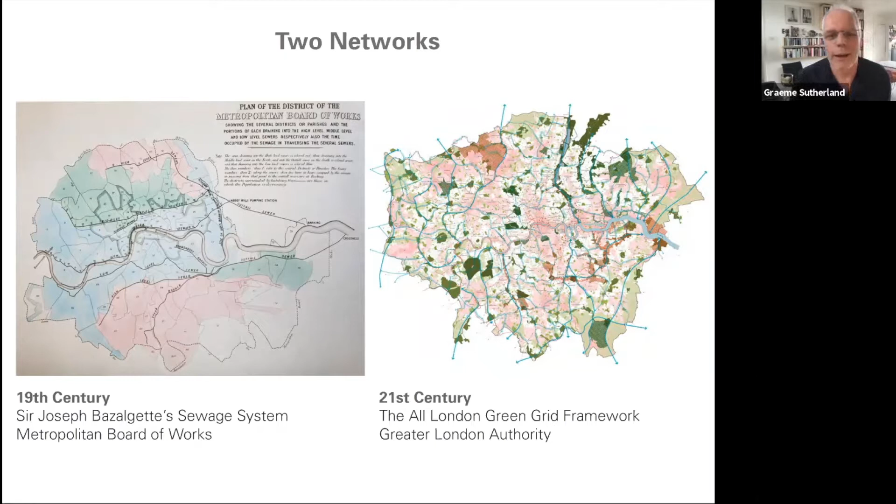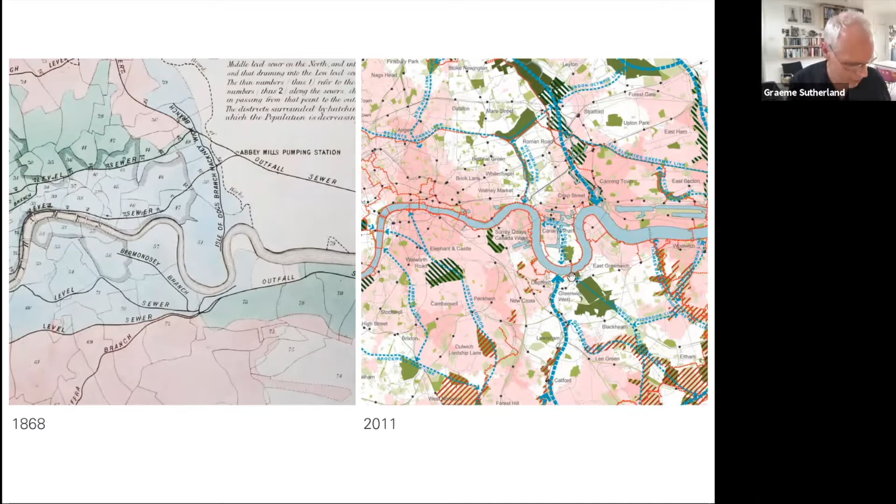I think that's useful. Neither of them are abstract systems. They're not abstract grids. They're sensitive, grounded in circumstance, and all about the particular, which I think is also really important and interesting. Zooming in, I'm also going to talk about how we have encountered both systems, working in the Greenway in East London, and how we've overlain essentially a bit of the green grid onto what you can see of a sewage system. And this is now history. This is not current work. 150 years ago, Bazalgette. 10 years ago, what we did, what the green grid was. What's happened since? I think it's interesting to think about things with a bit of distance and perhaps to reflect on what things have become and what they meant at the time.

But the beginning really of all of this, the beginning of London, is the river. And it's not just one river, it's lots of rivers. The dark blue are the hidden, the secret, the underground rivers. They've been bricked over time as the city's extended, but they're still there. And we're in an alluvial valley. There's a lot of rivers meeting the River Thames. And historically, rivers are a source of drinking water. And then almost at the same time, there's sewer. And gradually that doesn't begin to work. London became a pretty smelly and unsanitary place to live for many centuries. But the tipping point really happened in the 1840s and 1850s. The rapid urbanization of the centre, little attention paid to how waste was sorted, and the arrival of cholera and cholera epidemics, a topical theme thinking about epidemics today.

And so in the 1840s and 1850s, there were a series of cholera epidemics when thousands of people died in the city. And you could say the city was at significant threat. And it came to a head in 1858 when the Great Stink arrived, and the Thames was particularly noxious. And as is the way with these things, the change came because it impacted on Westminster. Houses of Parliament had to be closed, MPs had to be shipped out, and they were most upset. And so actually action began to be taken.

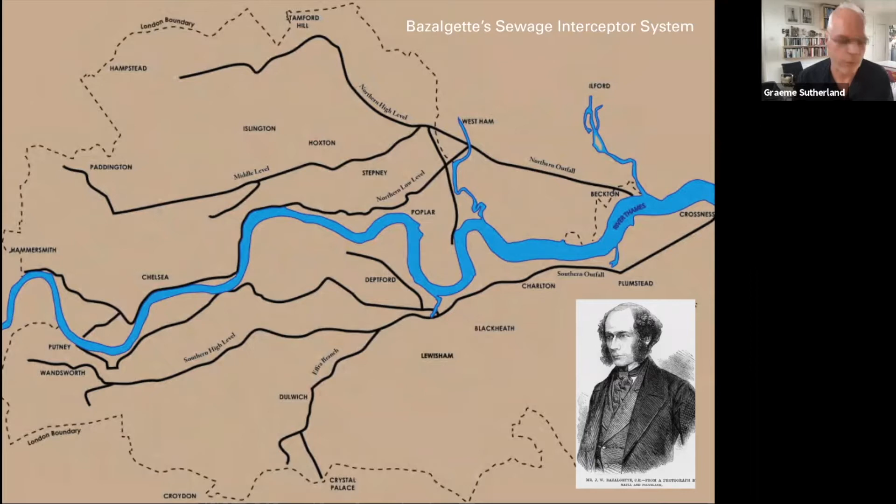What is interesting about all things is what happens as a side effect. What's the added value or the hidden extra? And here, the obvious one in central London is the Embankment. The Embankment is a super sewer. It's also everything else. It reframes London's riverside. It humanizes the north side of the river. It gives it that connection, notwithstanding the current traffic issues, that London's never had with the river. It sped the river flow up, so the river became healthier and cleaner, and it was built as part of the sewage system.

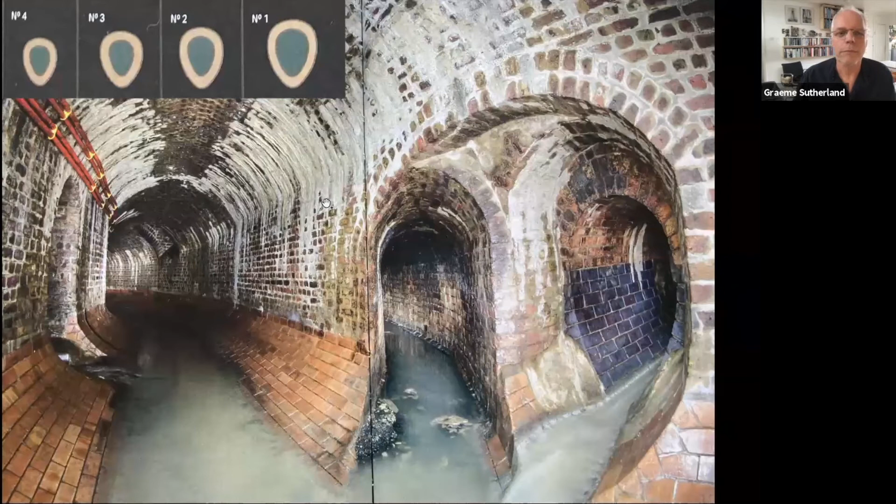Down in the depths, as I said, it's a very complex and atmospheric network, which I've not seen, but I've read about in some detail. There were a number of sections. One of the things about Bazalgette was he was fastidious about detail, and there are stories of him visiting site, a very senior bureaucrat being on site, ensuring the quality of what was delivered.

And you can see here glazed bricks in the lower part of the sewer and unglazed bricks higher up, the glazed bricks describing where the moisture usually is, and particularly hard wearing, and the kind of complex geometries of things coming together. So the shapes of the sewers vary a lot, but the smaller bores are all variations on the pear or the teardrop that you can see in the top left.

And the thinking behind that, which is really lovely, is you make it narrow at the bottom, which speeds up the flow, which hastens the movement of the contents of a sewer out of that area and on, rather than collecting it for a longer period of time. So when there's not a lot, it moves out fast, and when there's more, it also ships out at the same rate. So there's something very beautiful about that as a detail that perhaps describes a wider intention.

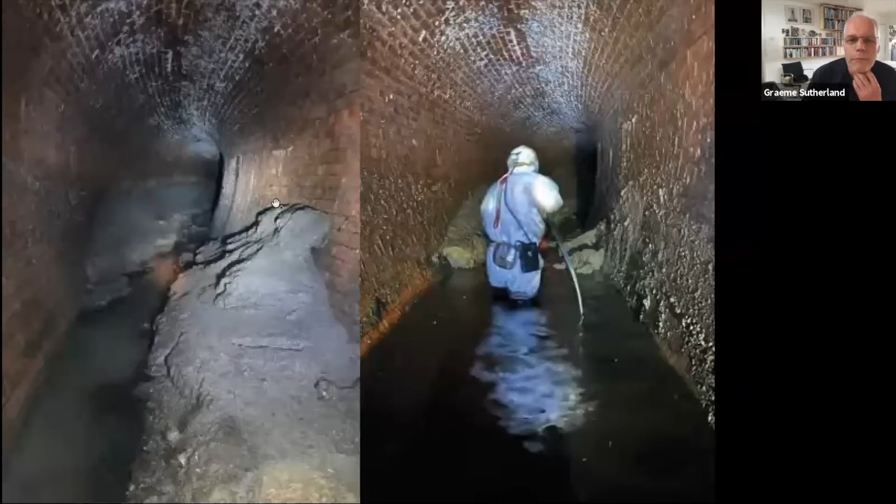That was 150 years ago. It's still here, and it's the reason that we are the city we are. It's the reason that London is a world city and has been so successful. You cannot underestimate how fantastic this bit of work was.

But it has been added to. There was major adding in the 20s and 30s. There's been tweaks and cranks. And then there are dealing with problems. Most people will know fatbergs, which are accumulations of fat in particularly narrower sewers, which is to do with what we chuck in the sewer these days. And a poor character spending his life unpicking it. But that's one example of what's going on.

But the longevity, I think, is really powerful, as is the reinvention. And I think that's something that's characteristic of really good infrastructural networks and frameworks, whatever their content or their nature. So it's the capacity to absorb what's gone before, and then the capacity to reinvent themselves and to evolve and to retain their usefulness.

And this is the London Tideway Tunnel, and this is an enormous bit of infrastructure. It's £4.5 billion worth of infrastructure. And what this does is complete that diagram that I showed earlier of Bazalgette's sewers. Because what I didn't say was that the sewers are combined, which meant surface water and effluent and sewage go in together. So when it rains, they get quite busy. And when it rains very hard, they overflow.

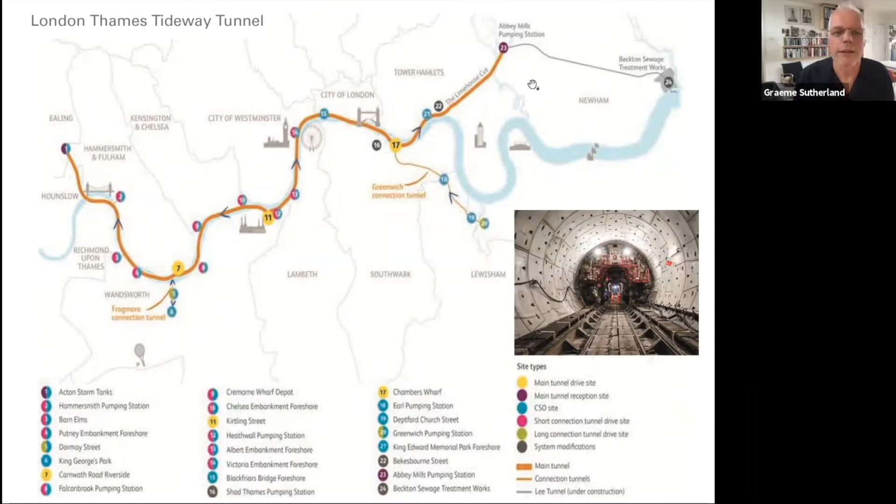And it continues to the east. It joins Abbey Mills pumping station, more of which later, a very important moment in the network. And then a new tunnel is bored under the Greenway heading to the Beckton sewage treatment works. So it parallels what's going on, at a deeper level. You can just about make out the orange high vis of the workers in the photograph. It's a huge tunnel, which describes its capacity and its need. And that's, I think, really exciting. And it's testament to the system that we have, that it can take that addition and that amendment.

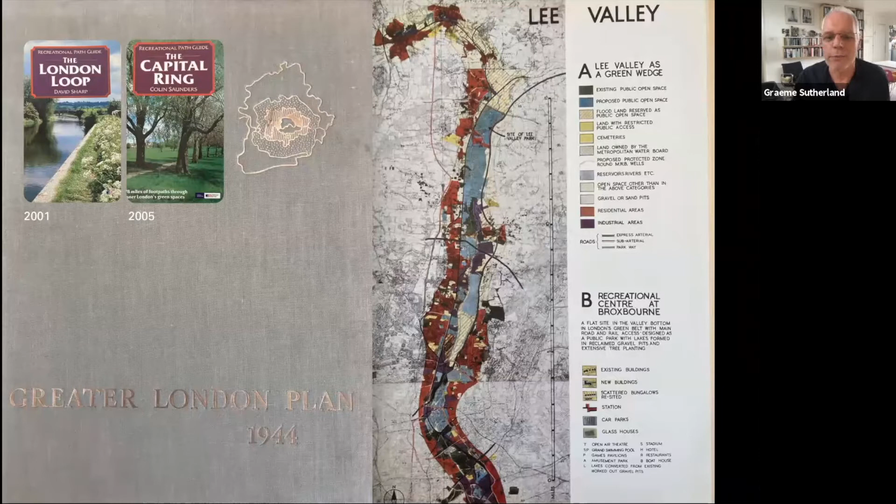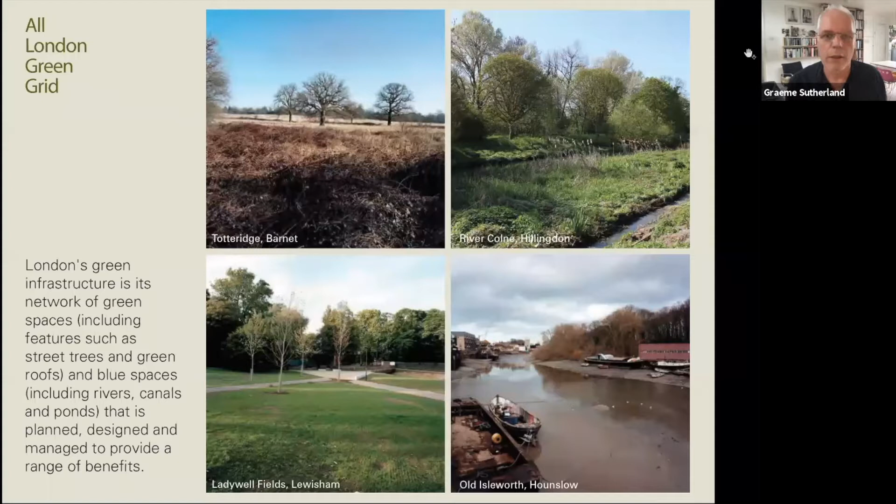And the Green Grid, really, the idea behind it was about connecting, making connections, and describing the layers of benefits you can get from that, and making that very clear. And thinking about multi-use again, right at the beginning. So it's a place of amenity, it's a place for healthy living, it cools the urban environment, it promotes sustainable food, it enhances biodiversity, and introduces resilience.

It's got many aspects to it, and that multi-headedness is really important and very strong. And then lurking in there is reducing flooding, and that's very topical, particularly in our times of climate change and the climate emergency, that's very important. But reducing flooding before it gets into the sewer network is actually helping Bazalgette. And so relieving pressure on the sewage network is one of the jobs of the Green Grid. There's a nice bit of synergy there, and that's good.

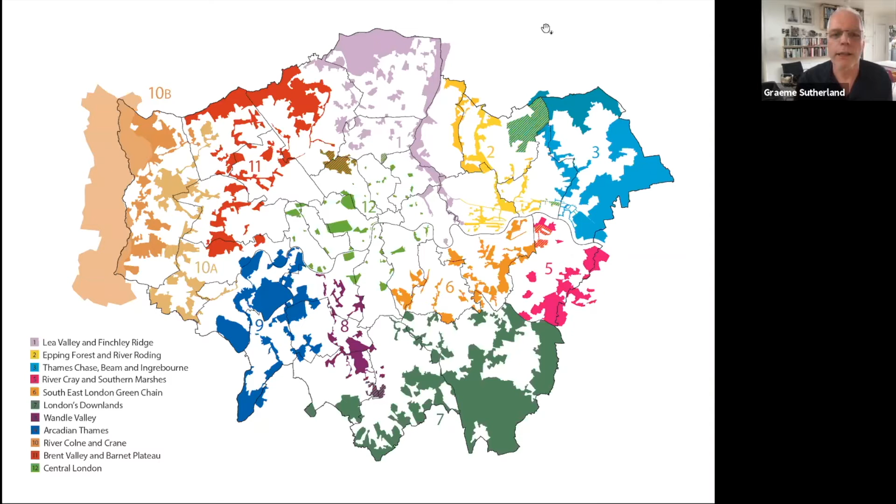So when it came to thinking about making the grid, and the Green Grid is really just a set of books with a set of drawings and a set of join-the-dots projects. How do you make things connect up? How do you make this network really work for animals and for people, for water? And where can you unlock those connections so that it's possible to have parallel networks of ways of inhabiting and using the city?

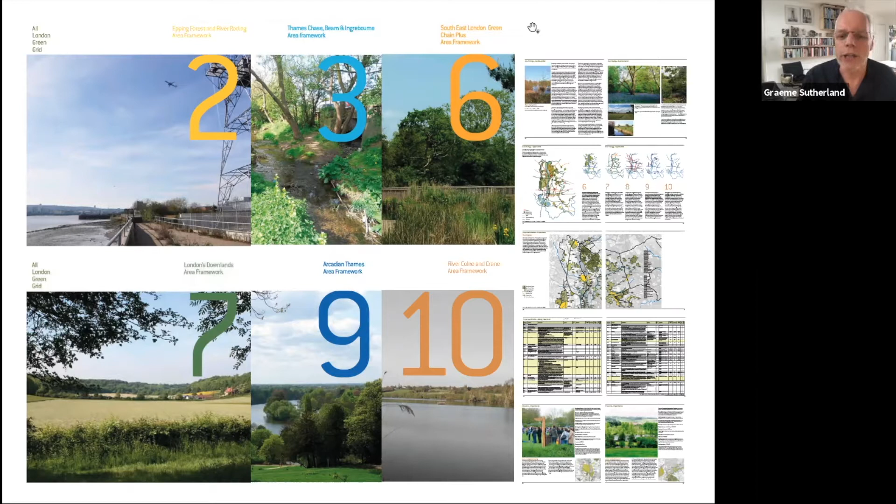And so each of the frameworks has got its own characteristic, its own description of its place, and slightly different priorities. So some of the outer boroughs began to look at how the green belt is used, the value of those spaces in between green belt and city edge, the rise of city farming at the edge, where people are still farming and encouraged to grow things coming back into the city. Water courses, and crossings, woods, and the rest. And the projects, a wide range, physical or to do with activity, but really about supporting that.

So that was 10 years ago. And policies have a shelf life. Politics moves on. The Green Grid still exists. It's less referred to, but it's there. It was taken up by boroughs. It's referred to as an idea, and the database is used.

And the byline for the national park city is greener, healthier, and wilder. So you can't argue with that. It's good. And it has a different emphasis. So it's not policy driven. It's not top down. It's not a kind of network to be distributed. It's not just strategic vision other than the idea, which is a shift in values.

It recruits people, and it invests small organizations with value and makes connections, and celebrates how you personally might influence or impact your local nature reserve, the connection to your local park, the users group that you're connected with, the waterway that's near you, or how local gardens in a street might change their nature. So it could be a very small project or a very large project. It provides an umbrella. So in that sense, it's very good.

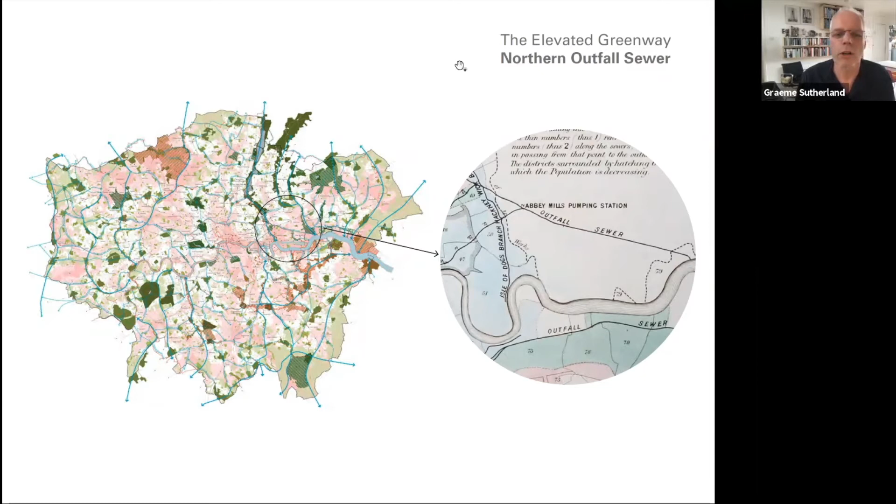Our involvement in sort of overlaying one with the other happened in the Lea Valley. It happened initially across the Lea Valley where the Olympic Park was, and then extended to the length of the Greenway. So really to talk a little bit about what we did, and some of the tactics we used to look at the connections between those two ideas. I'm not sure we thought the Greenway we were doing was part of the Green Grid particularly at the time, but it certainly was. And we were very alert to Bazalgette's work and the importance of that.

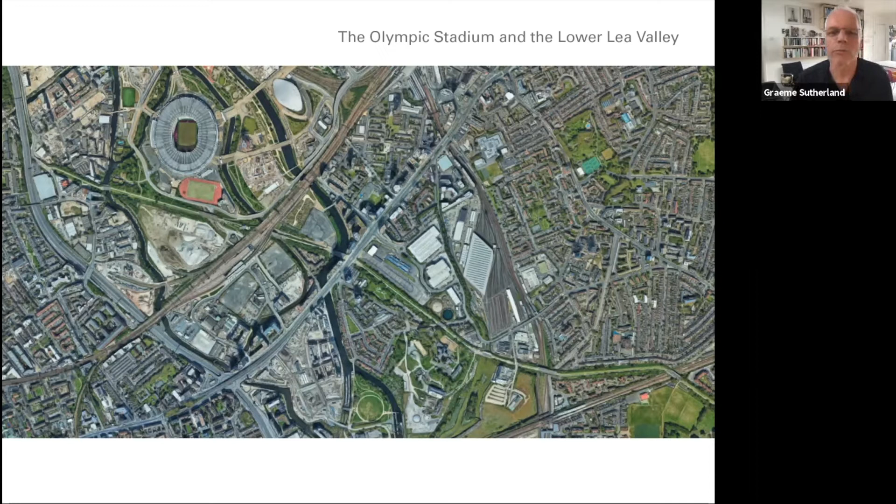Essentially it's a raised path. It's always been a raised path. As soon as it was built, it was a raised path, and local people have used it, until about 20, 30 years ago illegally, but it was still there. It was a Thames Water asset that people got on and used. About 30, 40 years ago, it became the Greenway. So it became codified as a path.

By the time the Olympics had alighted in the Lea Valley, it was an interesting place, a fantastic wild landscape, but also for them an opportunity to create cycle and pedestrian access to the games, which was sustainable and also had an element of legacy. I think the most important thing about Olympic Games is legacy. And one of the key strategic things about legacy across the Lea Valley has been connectivity, making it easier to get from Tower Hamlets to Stratford and back. And a key part of that was uplifting the Greenway.

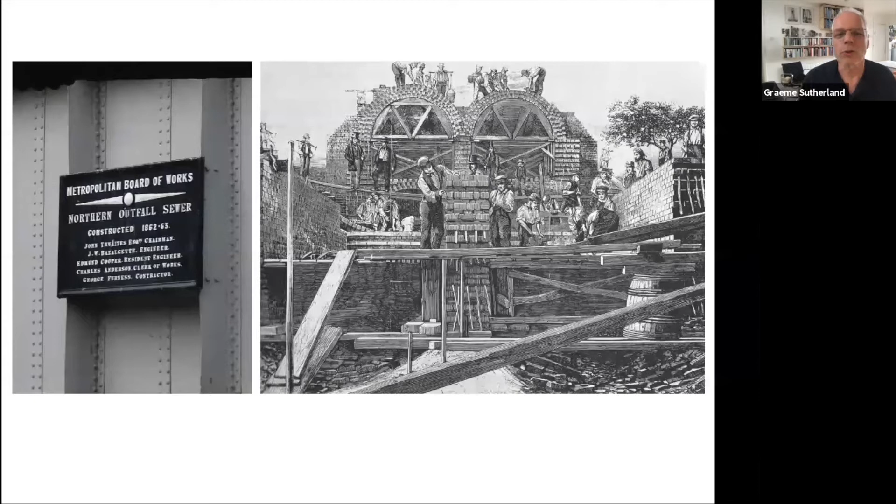The thing was, we really liked it as it was. We thought that wildness was really important, and we were successful in retaining that character. And underneath, of course, you have Bazalgette. I think that's him balancing on the beam in the middle left etching, looking at the construction of the two bores of the tunnel, finished in the early 1860s. And then in the 30s, they added another two. So it's a 4-bore tunnel.

It's a raised bank. It sits above the landscape, so you get the sense of both apartness and view across what was industrial, what is now still infrastructural, in spite of the Olympics, in terms of green infrastructure, the Olympic Park, some development, and then the city beyond. And for us, it was about the opportunity to make a new path. That was what was required. It was really about upgrading a space.

So we thought of this as our longest building. It's 2.5 kilometers long, and it's about 200 mil deep. So there was something very nice about a very long and skinny building, how you articulate that and how it sits on top of this fantastic bit of infrastructure, which is hidden but fully functional. So that in itself was a constraint. Having contractors doing anything above the sewage tunnels is a source of great anxiety to Thames Water.

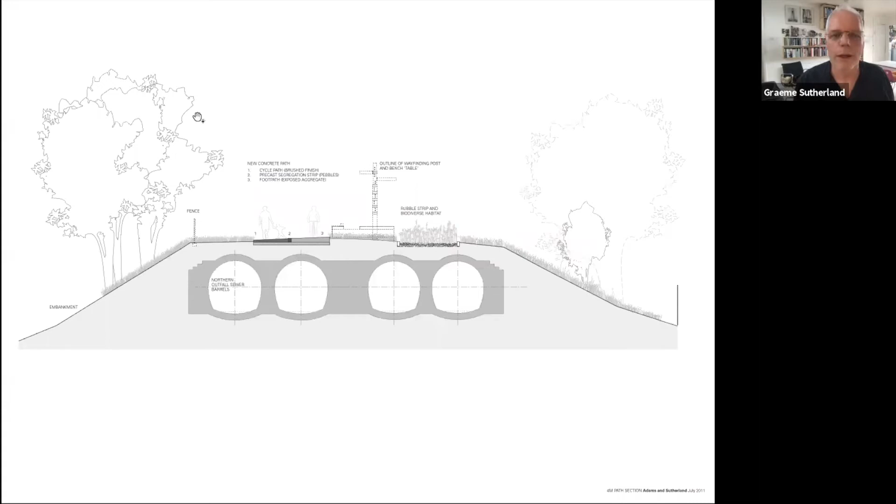So we laid a path, we laid a datum, we populated that with landscape, which was wild. We cleared the clutter, so there was a sense of view, and we introduced objects which have various programmatic requirements. As you walk along the sewer, as you walk along the raised bank, you wonder, what is this?

And then you come across mysterious alignments of sewage, of manhole covers. And one of the things we did was to frame them up and emphasize them. And as soon as you get a whiff, you're pretty clear what's going on underneath. So it's clearly something to do with sewage in the area. But by framing them up using recycled materials, we were kind of beginning to describe what's happening in the landscape, and making a connection between what you can see and what's underneath, and also interrupting what's a very long, narrow path and giving it a series of breaks.

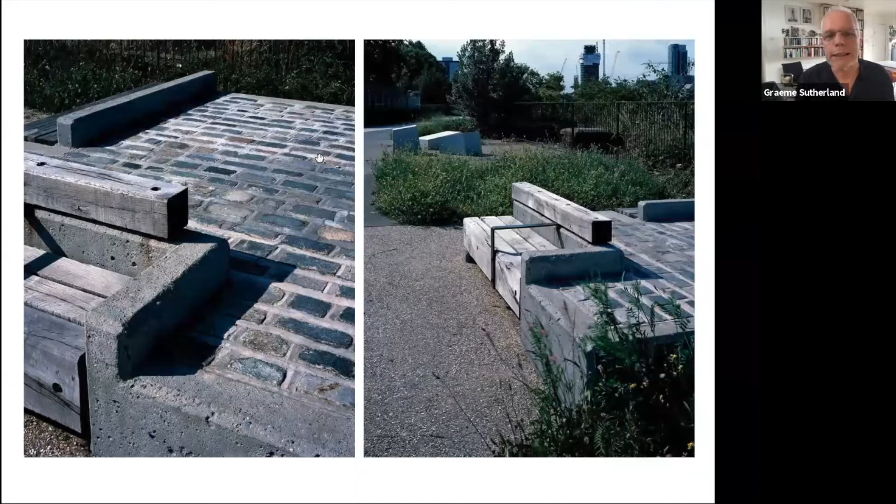There were places to sit, places to pause, and they were done in a really robust way, which has got much more to do with the world of civil engineering than it has to do with benches and high streets. And it's important this was not a high street. This is a wild place, and it should remain so. And we also knew the Olympic Park would have its own identity, which would be parky. So it was important it was not the Olympic Park, wonderful as that is.

There was a narrative around habitat, and as you saw from the section, there's a very skinny bit of ground on top of the sewers. So it's a very thin layer of ground, which is ideal for those species which like low nutrition landscapes. So we made that even more so. We made rubble beds. This is a rubble bed made from recycled roof tiles from buildings demolished by the Olympics, which then supports a different kind of wildflower and wildlife. And so I think we successfully increased the biodiversity across the site.

As with all things to do with multi-use, there's always points of interaction, shall we say. So here, what we had to resolve was the pressures of a cycle route, and people who quite rightly really enjoy this, and we're improving it, making an upgraded path and a clearer differentiation between ground and path, and the place is lit, so that became a really good cycle route. But equally, the Olympics had a very commendable and far-seeing program of accessibility. And so it was important that we had a fully accessible landscape.

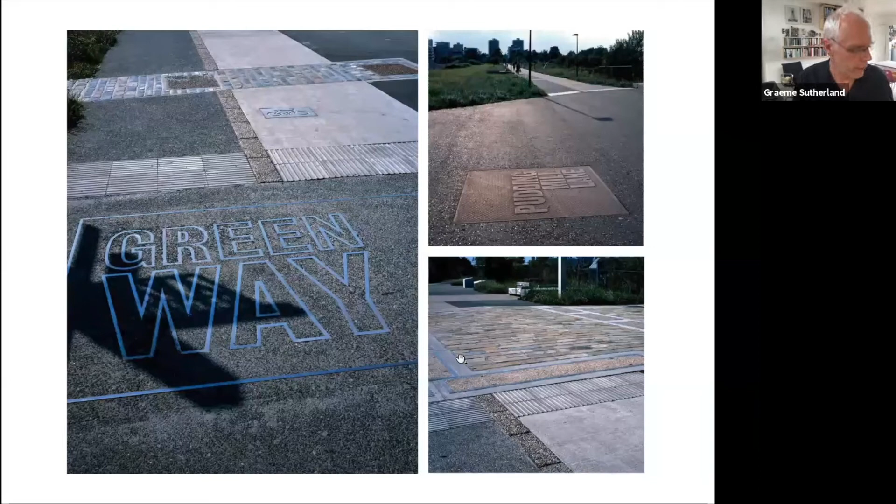And then there are areas of special manholes and manhole covers, which are part of Thames Water service and access requirements. And these all get lifted and taken out. I think these are to do with damming the sewers in times of need. And so there we took the opportunity of looking at different kinds of infill.

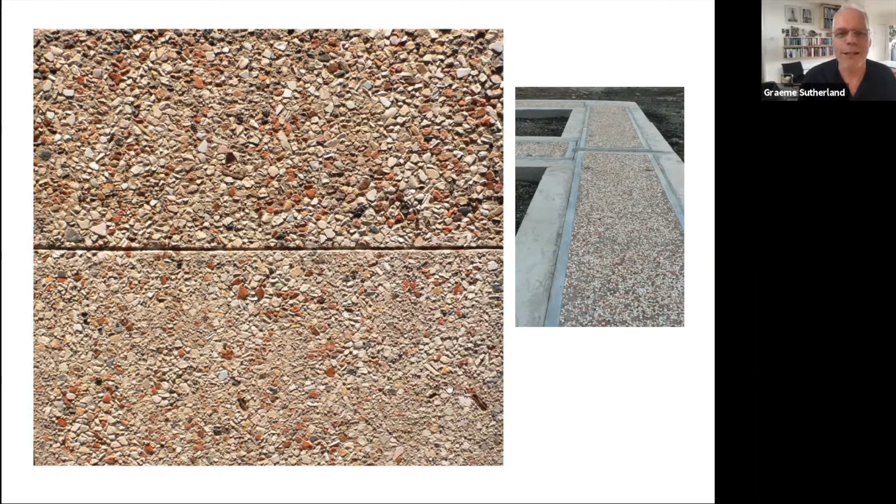And this wonderful material, I don't know whether it's still made, but at this time it was called Traxmax, and it's a recycled aggregate. And the color comes from the fact that it's recycled domestic china things, i.e. toilets. So the avocado suites of the 1980s have found their way into describing the sewage network of the 1880s in the 2020s. But very beautiful.

So the other thing was that it was quite a surreal landscape. There were objects around, and some of those objects were functional and they had a reading. Others less so, but there was a kind of character of that surreal and a mystery as well.

So one of the requirements of the accessibility audit was that we had to have a perch, a place to rest every 50 meters. And that really helps those who are less mobile. Doesn't mean you have to have a park bench. So we introduced these concrete blocks, these perches, which clearly are working for those younger candidates there, but for various people, they work. And we took the opportunity to think about, well, can we have some fun?

So they're all numbered. And the numbering, those of you who know, AOD stands for above ordnance datum. And rather than it become a milestone or 20 meters to this or 500 meters to that, every perch has got its own essentially height above sea level. And if you walk along the Greenway and you keep your eyes peeled, you'll notice that they descend. Of course they do, because the Greenway sewer is laid to fall.

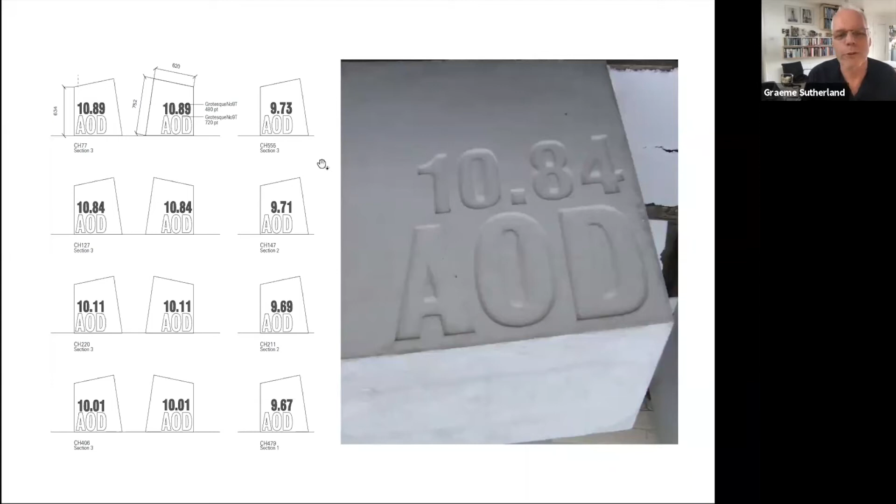The sewage is pumped out of the ground by the pumping station at Abbey Mills, and then it falls 7 or 8 kilometres east to the sewage works at Beckton. So it's a very nice way of just describing a very subtle thing that's happening in the landscape that you wouldn't otherwise notice.

The fall is very subtle indeed, but do the math, it's there. There was the whole thing about identity, which I won't dwell on, but it was to do with character and vertical elements in a flat landscape, and generous and robust signage, which has got a different character again. And so that was what we did on the Olympic section of the Greenway. But that was really only about access and physical improvement and our enjoyable narratives.

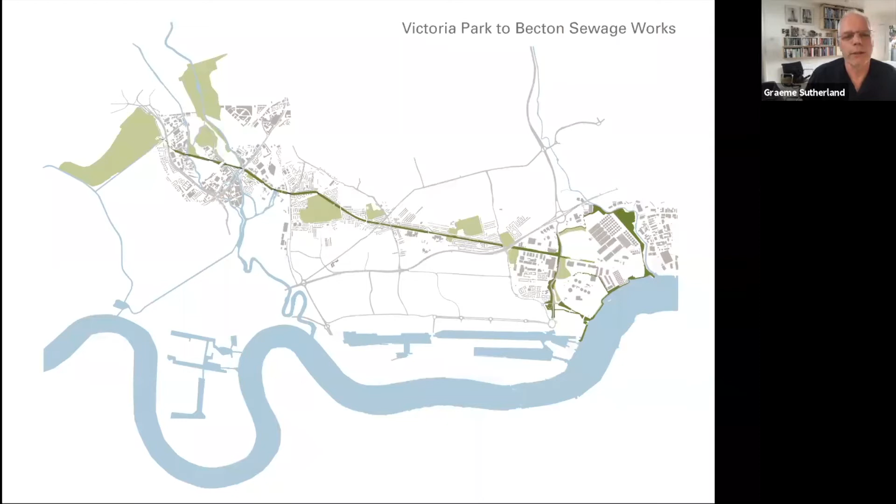There's more to green spaces than that, and there's more to the Greenway as well. The bit we've looked at is just this bit, so the first 2.5 kilometres. There's another 8 kilometres in total from the pumping station here, where the 3 levels come together, down to Beckton sewage works in the east. And as part of Legacy, Thames Water, who were the asset owner, the Olympic Delivery Authority, who were funding it, and GLA, who were the key stakeholder, came together to think, can we look at a project that brings benefits to the whole Greenway, not just the bit that touches the Olympic Park.

And as you go east, it changes. It becomes less of a bank. It's a bank in places. It becomes more domestic, back gardens back onto it. We lose some of the wildness, but it's still a pretty extraordinary space. And it's a very well-used path. But it's a path. So what do you do with a path?

It's not that wide. So thinking about infrastructure, a really good example of infrastructure with other meanings is the Lee Valley Reservoirs. This is the King George Sailing Club, the biggest sailing club in London. This was not built as a lake for sailing. This was built as London's water supply, but it's now also a place of amenity. So could the Greenway be a very skinny reservoir and do a lot of other things and not just be a path? And as a way of doing that, we worked up a strategy, and that strategy had to do with making a coherence. So some of the stuff we've done already, bringing it along and uplifting its visual appearance, but that's probably the least important thing.

We identified a number of places, mostly adjacencies off the Greenway, which could support other activities, whether it be play, whether it be growing, whether it be a whole access. It could be a raft of different kinds of new connections to green infrastructure. So spaces that would extend the space of the Greenway, and they tend to be in the ownership of the council. The Greenway is in the ownership of Thames Water. So working with Newham Council was very important as well.

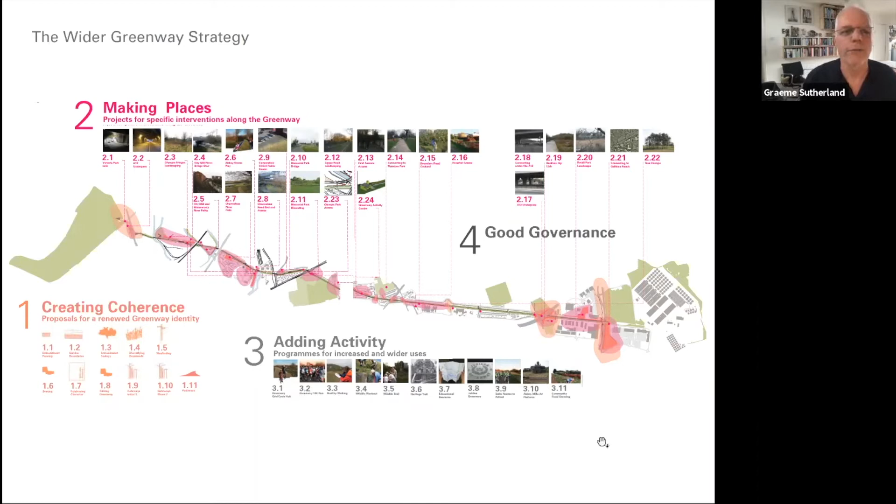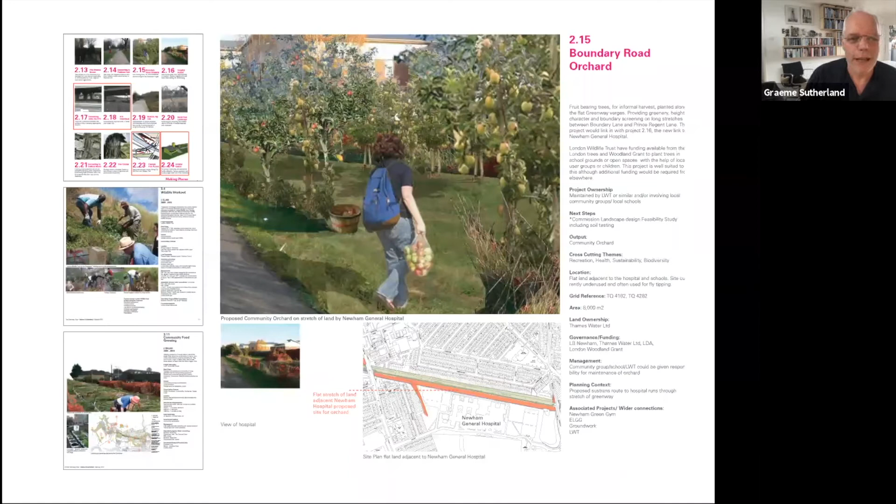And then on top of that is this idea of activity. So what do people do there? What can you do and how can you program it? So from introducing things like tours and the Greenway Run to a whole range of ideas. And then tied in together, how does it work? Who looks after it? Who gets involved in it? So a bit like the Green Grid, that became a mini document, full of a lot of ideas. It went out there.

And then we started looking at some of the connections we made, and one in particular, where we sort of knocked on doors, and this is Newham General Hospital, now Newham University Hospital. It backs immediately onto the Greenway. Its grounds are an appalling mix of car park and leftover space. There's been no attention paid to any kind of external amenity, apart from the odd courtyard garden. And that's not going to change. So that's something that could really be looked at.

And we thought, well, the Greenway billows out at this point. It's wider. It's got an immediate adjacency. The hospital has organised around a single corridor. If you made connections to the Greenway, which is more or less at grade access here and here, you could introduce a whole circular route. You could have new gardens. You could make a kind of therapeutic walk that was part of the hospital treatment. So this was all kind of exploratory, shall we say.

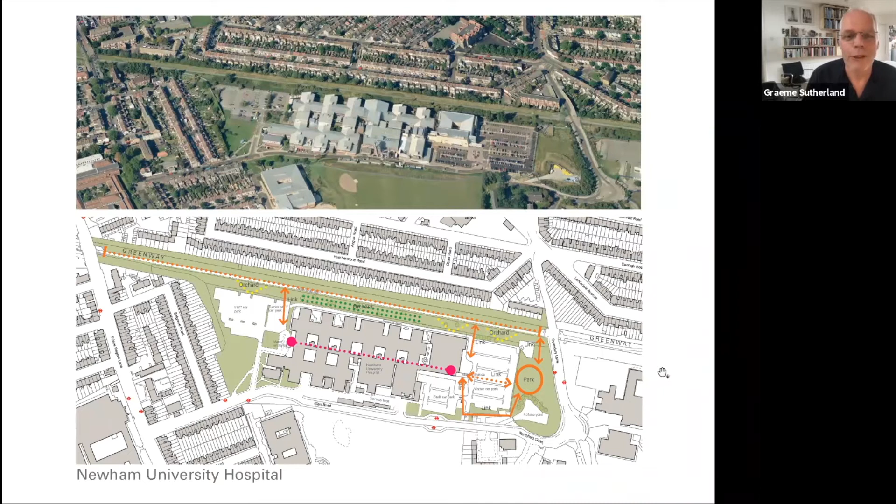So we went to speak to the hospital, and they were really happy, and they were really interested, and they were particularly interested in the idea of an orchard. And we talked to the hospital administrators, and we worked up a scheme for an orchard, which would be a community resource. It would be quite significant scale, and the produce of that orchard would feed into the canteen in the hospital, and there'd be a sort of literal symbiosis. And that was all ready to go.

And then, it being 10 years ago, we had austerity, and we had a change in government, and we had a complete change in politics. And the document died. The hospital at the same time became a different trust. So everybody we talked to disappeared. And the conjoined trust with two other hospitals had a different agenda. So this sort of fine grain, speculative, improving their adjacency for multiple use, but very difficult to pin down, was not on their agenda.

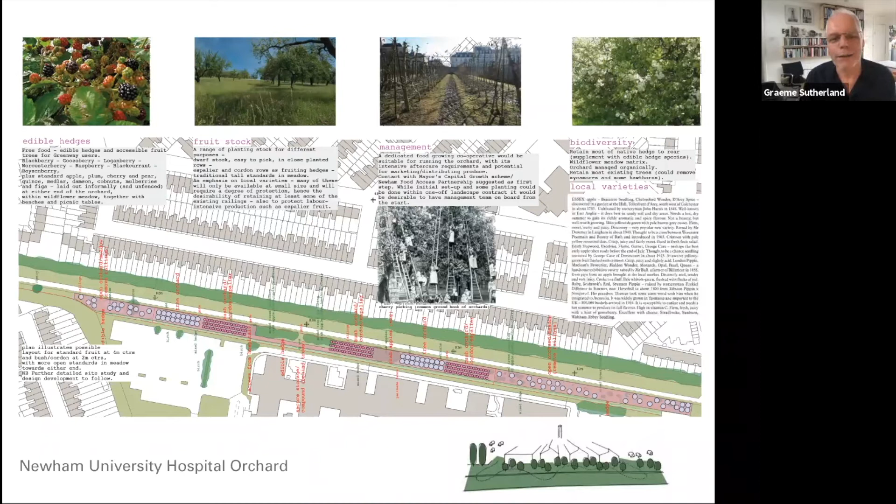And that's where it was left. And so what happened next? So actually what happened next is that maybe what we do is we're gardeners. The seeds grew. Some of the work that was in that book was taken up by Newham, and they have made improvements to entrances. They've taken some of the Greenway identity a bit further along, and they've done some things.

But actually, what's much more interesting is that the Greenway Orchard Green Gym has appeared next to the hospital, and there is an orchard there, and there's a really vibrant small community group, very keen. And this was 2020, and they're just about to reawaken after the pandemic. There are trees, there's crop, there's produce, and it's really satisfying. And they recently raised enough money to get themselves a shed. So there's a sense that things do happen over time, and I think that's pretty heartening.

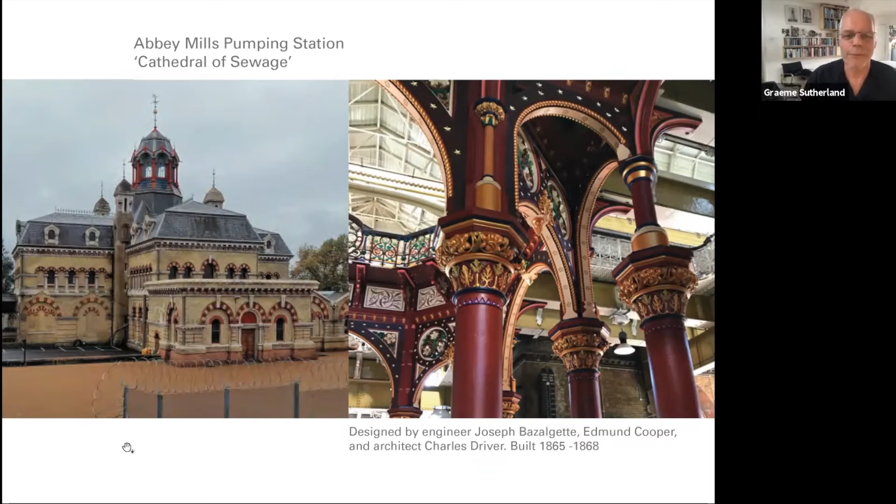And it was a severance, if you remember back to Abercrombie's plan of the River Lee walkway, 23 miles of leisure connection from Ware and Hertford down to the River Thames, blocked by the 1960s Bow Roundabout, which meant, before the work was done, you had to get out and cross the road and go down. But crossing the road meant crossing a 6-lane dual carriageway going in 4 different directions. So it was not easy. There was no crossing. So that's a clear blockage in the system. And in retrospect, it's a clear green grid block.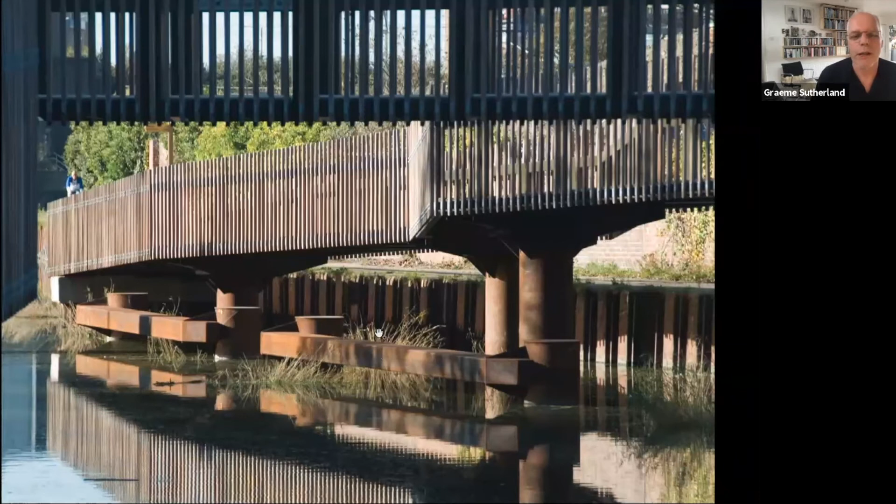And the spaces underneath and around, the character of it's driven by the nature of existing sheet piles and new buffers to stop boats demolishing our piles. A filigree of vertical fingers of timber, which, unlike handrails that close down, opens up to the sky, so it's not about closing you off. And you can see a secondary structure hiding in there, which is the beams which hold it all up. That very nice sense of layering. And also cranking it meant that cyclists couldn't go quite so fast, and there was some chance of coexistence.

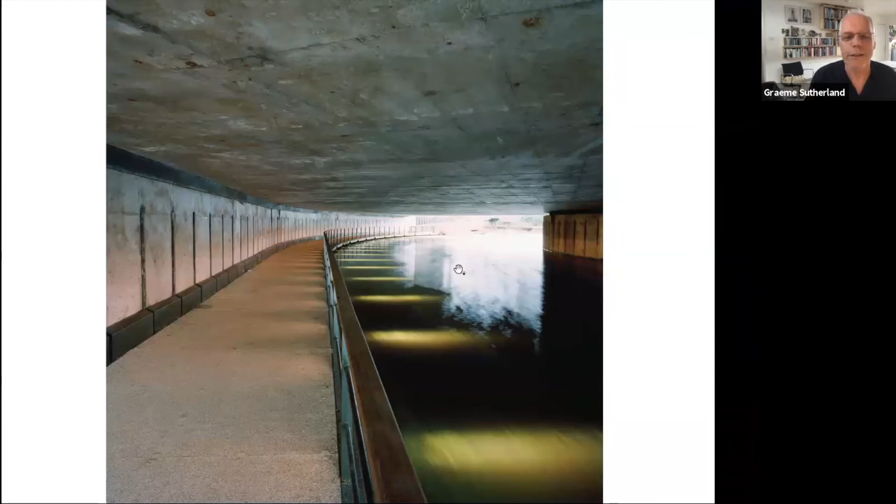And then as you go under, the space is just fantastic, and this has light, but even when there was no light, it's really about just removing the darkness and light, the shadow that you get, the contrast from inside to outside. But one of the things that we did here was, working with an artist, we introduced some light which was hidden in the balustrades into the edge of our walkway here, which shone across the water, and then was angled such that any movement in the water then sparkled on the far wall. So there's a sense of movement.